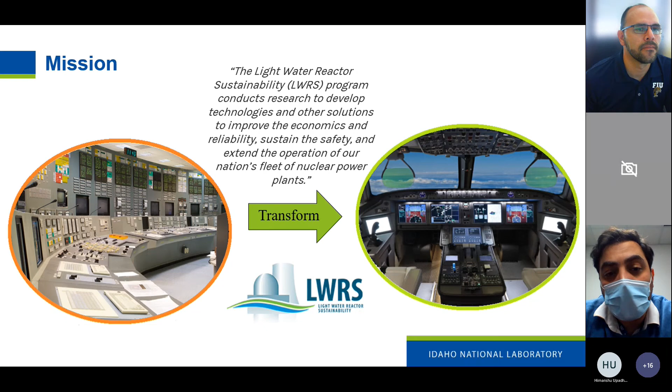Within that transform arrow I'm showing in the middle, there are multiple key technologies that we leverage, and AI is one of these key technologies. What I'm going to do today is describe some examples of how we're using AI to automate some of the activities in a nuclear power plant.

The first application, or set of applications, is condition monitoring. When you talk about condition monitoring, it basically means you're trying to determine how much lead time you have for an equipment to operate normally before it fails. Everything in time is going to age, and every piece of equipment in the plant is going to at some point require some sort of maintenance in order for it to be operable. The key question is, how long do you have?

In terms of the model that we have at the moment in the plants, if you look at the failure timeline to failure, usually right before the failure you would have some sort of alarms, and usually operators get these alarms and act on them. But on the other end, you would have maintenance activities that are not based on any observed issues with the equipment, but predicted based on historical data from this and other equipment—this is how much time you would have for this equipment before it fails. So you need to do some maintenance before that.

What we're doing is researching into all these different aspects of condition monitoring. Specifically, I have been mostly interested in anomaly detection. Anomaly detection is an area that falls right before alarms but after predictive maintenance, and it's a function that's currently performed by operators.

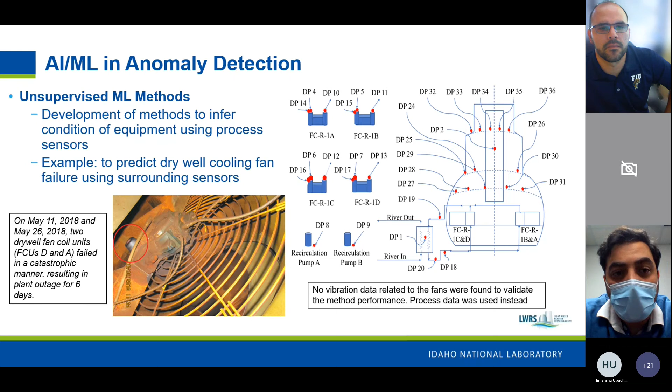The hypothesis we tested was: well, if the fan is degrading, then the temperature profile is going to get impacted because the cooling is not going to be as efficient, and then you might see some rise in your temperatures. And that's the hypothesis we tested.

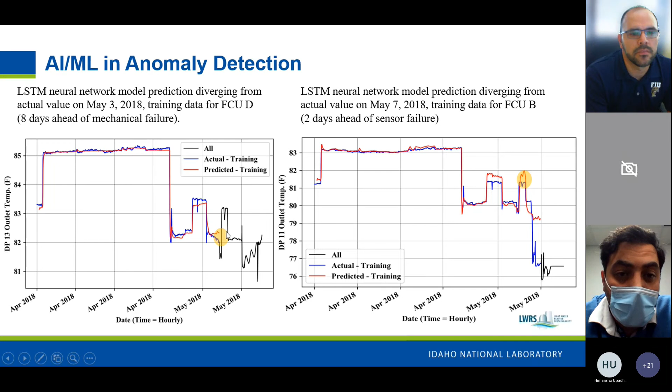Now, this is the prediction and creating the residual parts. Now, once we have the residuals, the next question is, how do we build the classifier to decide that this is an anomaly or not? So in this case, we actually tried multiple different approaches. And one of the approaches was to conduct an F-test using the variance of the residuals.

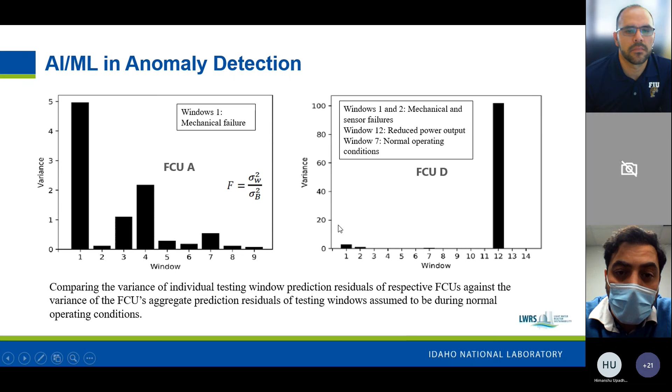Another aspect of this anomaly detection that we've looked at recently is, when things fail in the plant, you gain some knowledge. So if these fans I just described to you experienced a failure, that's information that you can use to improve your training process. The problem is that when you're trying to label some of your failures, you're not going to end up with a complete set of labels. So most of the time, you do not know whether this equipment is actually in a fully normal state, or it does have some issue that's undetectable and growing, but is there.

So most of your data is actually unlabeled, but you do have some cases where your data is labeled because you did observe some failures. And that's why we had to look into semi-supervised machine learning methods. And in our case, these labels came from something called condition reports. I'll come to that today in my presentation and talk about more details, because there's much more research going into these. But condition reports are just documents that report the status of equipment. So sometimes they do mention that there is an issue with this equipment and it needs some maintenance. So that gives you a label.

And now you have to define a window of time around this label that you would apply to the data. So that's an effort that we started last year. And we've tested one of the methods that exists in literature, I think it's called DeepSAD. And we also developed our own. And there's actually a report published on this. But that's another direction that we also looked into.

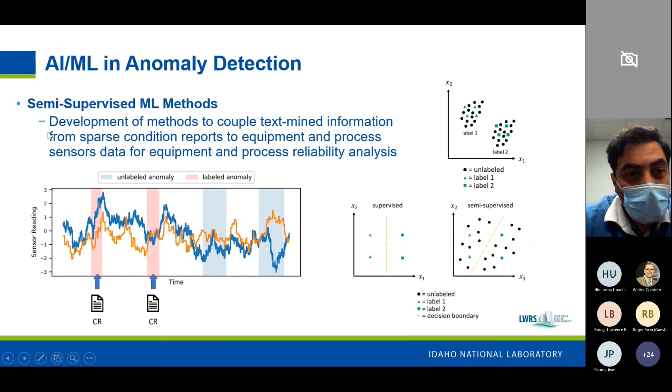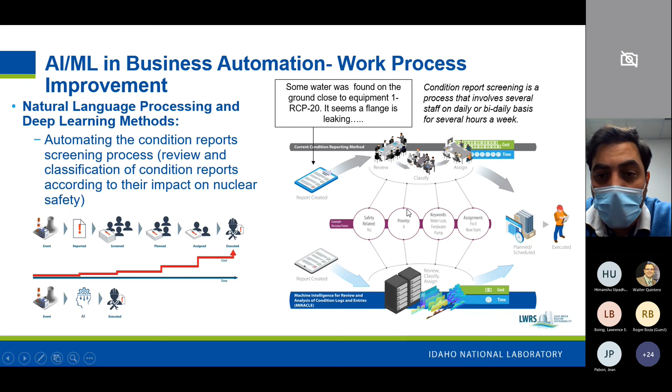And that's what we've been working on. We have something called Miracle that's been developed by INL for that specific purpose. But automating this process gives us a lot of insight. I just mentioned with the anomaly detection that with the keyword part, we can actually create labels that can be used for equipment reliability. And that's one application. But there are other applications that we are looking into in addition to saving time and cost. So this whole committee review process can be automated, but there are also multiple benefits to that. But before I dig into that, you might ask, what are we doing here?

Again, at a high level, we're taking all the fields, the categorical fields and the text fields here. We feed the text part into a feature extraction engine, and then we build classifiers based on these. For the feature extraction engines, we use models that are commonly used. Facebook and Google have some, like BERT or RoBERTa, if you're familiar with them. And the idea here is just to build classifiers on top of that.

Now, a broader benefit for this effort is inspection or assessment of plants. Nuclear power plants are highly regulated, which means that they have periodic inspections by the government, meaning the Nuclear Regulatory Commission, or assessments by independent parties that the industry has formed, like INPO. The aim of these inspections or assessments is to make sure that the plant is complying with the commitments it made in terms of its safety assurance, and they occur very frequently. And they are time consuming. They require a lot of time from the plant and also from the inspectors or assessment folks. So it is a lengthy process that requires a lot of data gathering and data analysis.

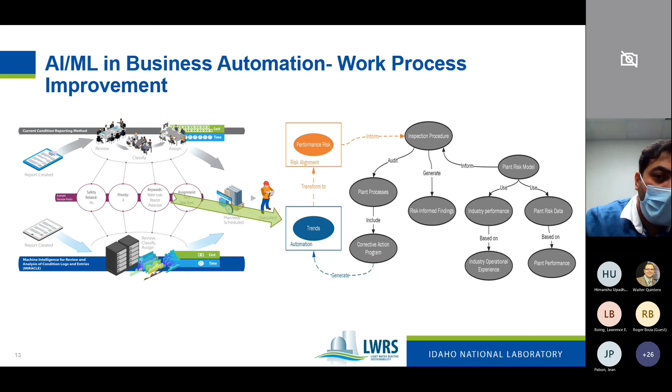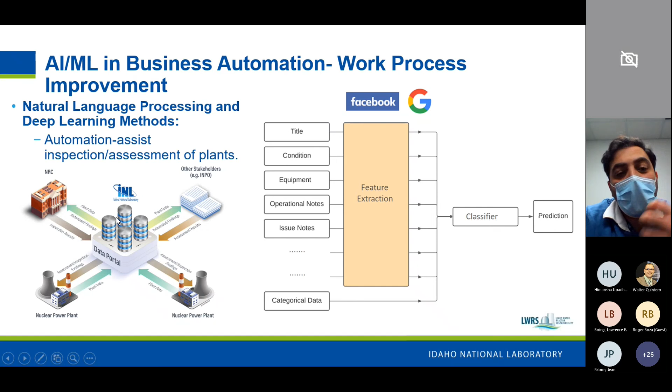When I showed you that picture earlier with multiple plants sending data into one location, one data portal, one of the key aspects is integrating data from multiple plants. We had to look at this, and that's a common problem with machine learning or AI.

If you're trying to build a classifier for a certain nuclear power plant, and then another plant comes in with their data, and you try to apply the same classifier to that plant, you'll have to do a lot of mapping, because you built that classifier to work with the data from the first plant, and the fields coming in from the second plant's data set aren't going to be the same. They use different terminology, different fields. Even though it's the same process, every plant can have its own unique way of applying that process. They don't have to have the exact same one.

So one way to do it is the manual mapping process approach. You basically take the classifier built for the first plant and start mapping the second plant's data to the first one. It's time consuming, you'll make mistakes for sure, and you might even have to discard some fields because they might not map to anything in the first plant.

Another approach is to combine all the fields into one single large field. So all the headers or columns in your data set, you combine them all into one input, and then build a classifier based on that input. That's another approach we tested, called the adaptable data mapping approach.

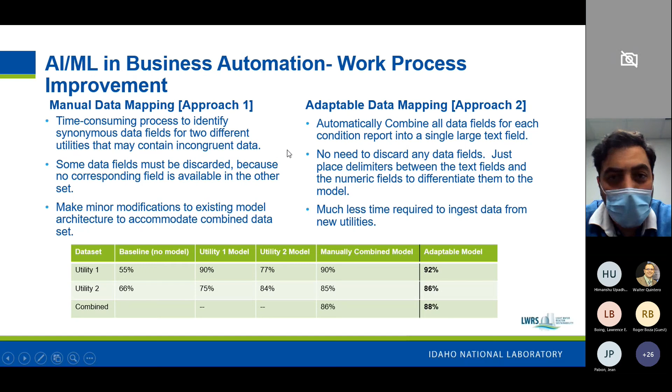We're also now looking at building a dictionary, as I mentioned earlier, but I'm not showing it here again because of time. So I'm just going to skip to the next topic.

Another topic we looked into is inventory management. In a typical nuclear power plant, you have an excess of $100 million worth of stocking inventory in your warehouses. The industry does that because they have a conservative minimum stocking requirement threshold usually set. It's usually safer to have things stocked more than what you need than to require a part and find out you don't have it and have to wait for it. That's the approach the industry has been taking.

What AI can do in this case is optimize the usage of that minimum stocking requirement number, that threshold, informed by the amount of work you actually do. If you know how much work you do, and can predict how much work you'll need to do, you can better optimize what parts you need and when you need them. That would save you a lot of money. We expect to save tens of millions of dollars for each plant using this approach.

When we started looking at this a couple of years ago, the first hurdle we faced was that a lot of the records in their inventory were duplicates. The same item was created multiple times. Every time they buy that item, they might not go find it and increase the quantities they have; sometimes they create a new entry instead. That creates a problem for a prediction algorithm, because you don't really know the actual inventory you have of that item unless you find these duplicates and consolidate them.

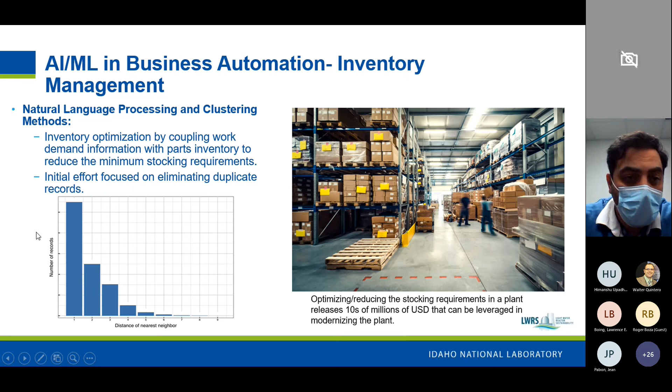So there's a lot of value in consolidating these records, and that's what we started with. This is an ongoing effort.

All right, so I'm moving now to a different topic, which is support functions. I think I have 10 minutes left, so I'm going to rush a bit.

The first activity I'm going to talk about is fire watch. In a nuclear power plant, you sometimes have activities that involve a fire hazard, like welding, and you need this to be monitored. What plants are usually required to do is have someone called a fire watch sit there and watch for a fire. In case there is a fire, they report it, or sometimes they take action and try to put it out.

Another case is when the fire protection system is down, whether for maintenance or because of a failure. Then they are required to have fire watches in multiple locations in the plant, and this can become really expensive. This number here, $1 million per month, is something we heard from multiple utilities, so this cost can become significant.

Now, if you would say, why don't I just put a camera and have someone build an algorithm that can do exactly what they're doing? That's actually what we did. We developed a computer vision machine learning algorithm that can detect fires in videos, and I'll show you examples in a minute. The problem is false positives, which represent people being called in, or maybe calling in the fire department. You want to reduce the false positives as much as possible.

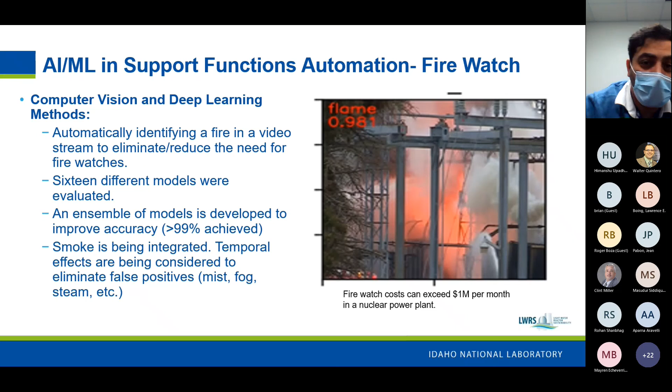We're also looking at ways to detect smoke. Smoke is more challenging because you have steam, leaks, fog, mist, all of which resemble the shape of smoke. So building a classifier just to recognize the shape or look of smoke is not going to be enough. We're now looking at using temporal effects, the motion of smoke, to distinguish it from steam and others. If that doesn't work, we'll still have to figure out a way to do it, because it's really valuable.

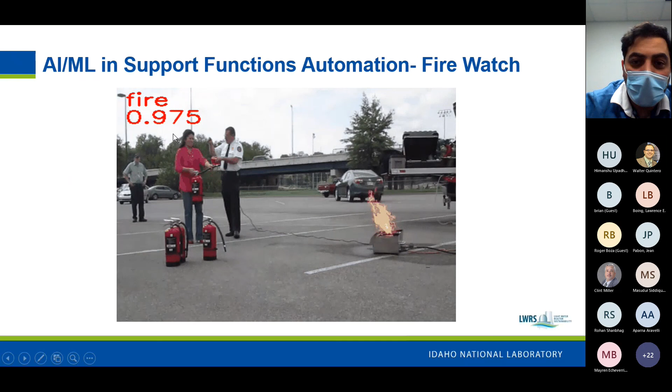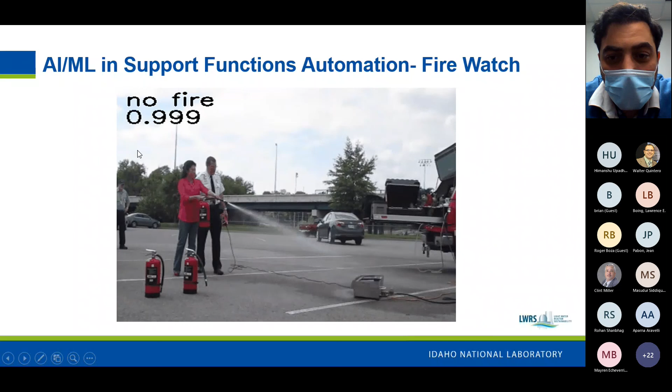I'm showing here an example of the results we got. The thing I like about this video is the fire is on and off, and you can track it as it goes down. You can see the accuracy going down—there you go, no fire—and it comes back up. Fire, no fire. Just a small demonstration of how the algorithm is working.

One of the challenges we faced is that sometimes the algorithm was classifying fire and we couldn't understand why. A good example: a lot of the videos had firemen in them. When there was a fireman in the video without fire, the algorithm would get tricked into saying this is fire too, because it learned the fireman as a feature of fire, which is of course wrong.

So we decided that we need to create some form of transparency to know what the algorithm is actually looking at. And we used an algorithm that already exists, I think it's called GradCam, but I'm using memory here so I'm not sure. It can actually provide you with a heat map of what is the driver for that decision when it detected fire.

In this case, for example, you can see that the heat map is pointing around this area, which is where the fire is. So it's actually correctly classifying the fire for the right reasons. In other cases, you would see that it's actually pointing at things that look like fire but are not fire. Even though there was fire in the video and the classification decision was correct, it wasn't doing it for the right reasons, which is also something we want to look into.

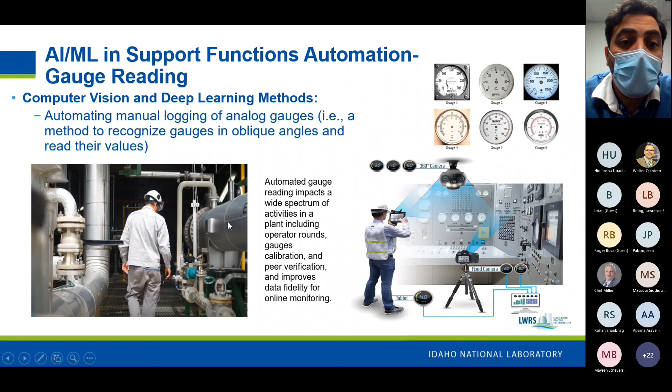Taking a picture of this whole panel at once and logging it is a matter of milliseconds rather than the time it takes to do it now. There's also potential for other activities - in some cases, when these gauges get logged, the plant requires someone else to go in and log them too, because they are really critical and they want two different people to do it. So now we can use something like this tablet to do that instead of having to ask someone else to come in and do the exact same thing.

I think this is the last application I'm going to talk about today, and in my view, it's one of the coolest. We're also flying drones autonomously in a nuclear power plant. The reason we're doing this is there are a lot of activities in a nuclear power plant that rely on people walking around and collecting data. This could be as simple as a security round just to check that everything is in order, or an operator round to check that equipment is okay and running fine. It could be inspections - in some cases you want to access hazardous locations and don't want to send people in. You want to conduct radiation surveys or warehouse surveys and so on. There are many, many applications for drones in a nuclear power plant.

Now the challenge is most of the nuclear power plant environment is indoors, so there is no GPS, and you have doors between these indoor environments.

Having something like a drone that flies using LiDAR or some other technology means you have to have one in each single environment. That can become really expensive very quickly. And then, of course, there's the battery capacity of these drones - they can only fly for a shorter period of time before they need to be recharged.

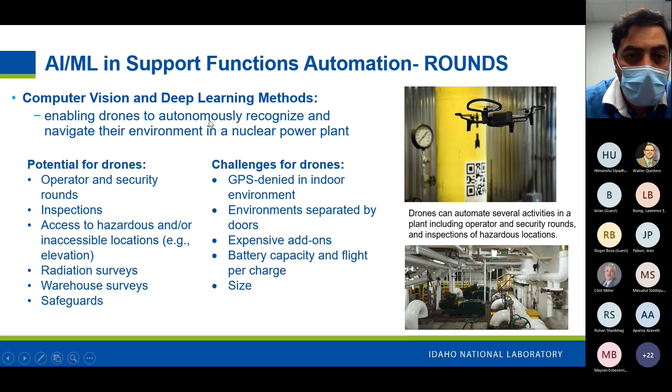So what we looked into is something cheap, because we wanted to deploy as many as possible within these door isolated environments. We also wanted something accurate, that can allow the drone to fly autonomously and accurately within these environments. So we created ROUNDS - that's the name of the technology. I'm going to play this video and then tell you more about it.

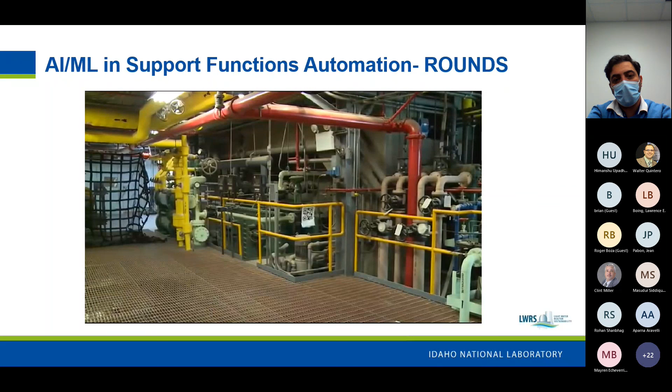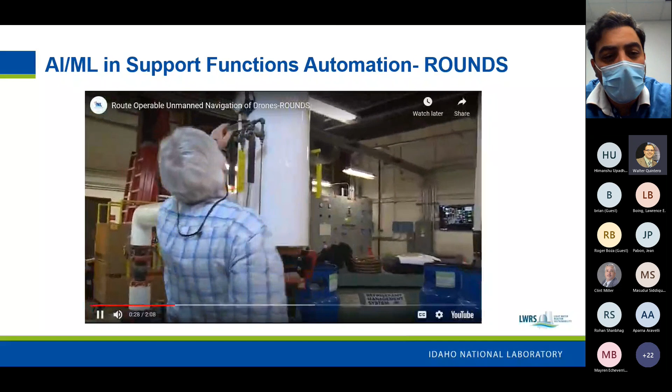There's no sound, Dr. Rashdan. There is no sound. Okay, I thought we resolved this. Apparently not, sorry about that.

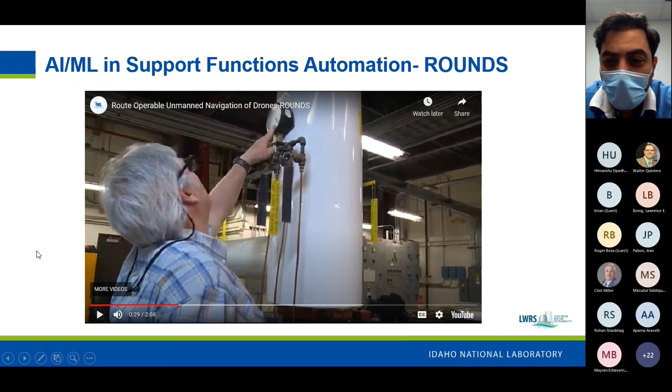The basic concept is we use inserted visual features, and we make these features easily detectable. Specifically, we're using QR codes, just like the ones shown here. You can actually print QR codes on A4 paper and deploy them along the path of the drone, just like I'm showing in this picture.

What the drone does is, when it's looking at that QR code, in addition to just reading it, it can actually look at the view of it. So if you're looking at the QR code from an angle, you'll see something like a trapezoid - you won't see a square anymore.

Rectifying that trapezoid to a square or rectangle, depending on the shape of the QR code, gives you insight about where the drone is with respect to the QR code, provided you know the size of the QR code. That's, on a high level, the concept of how this works.

So with this, if you find the location of the drone with respect to the QR code, all you need to do is feed it back into where you want to be, and you can have an autonomous flying drone. Ideally, we'd fit these along the route of the drone, which just looks for the QR codes as it flies, and we could achieve an accuracy in the order of a few inches.

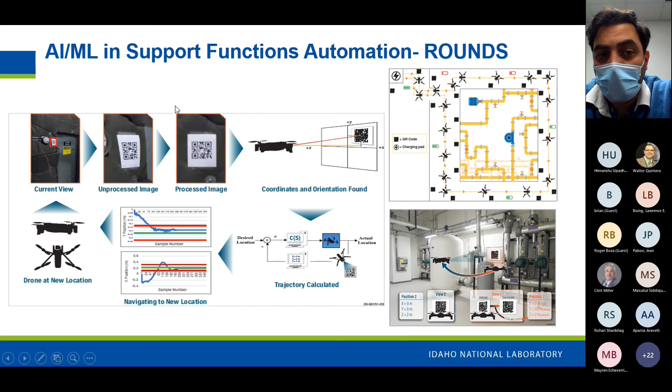Whereas the AI process - the AI in this is finding the QR codes within that environment, and then being able to calculate the exact location with respect to them. That's where the AI kicks in.

This one doesn't have audio in the first place. Because of Corona, we couldn't fly this at the lab, so we simulated this in a real environment - well, in a simulated environment, using the real algorithms. As you can see here, this is the drone from the top view, and this is the front view of the drone. You can see it flying.

I don't know if it's very visible, it's really small, but you can see it's actually finding the QR code in every frame, drawing a box around it, and from that box calculating the location of the drone to a high accuracy. In this case, it's going to land on the charging pad, and we can control how accurate we want it to be. And there you go.

And I think with that, I'm out of time. I'm actually one minute beyond the planned time, and I think I'm done. I don't know what's going on.

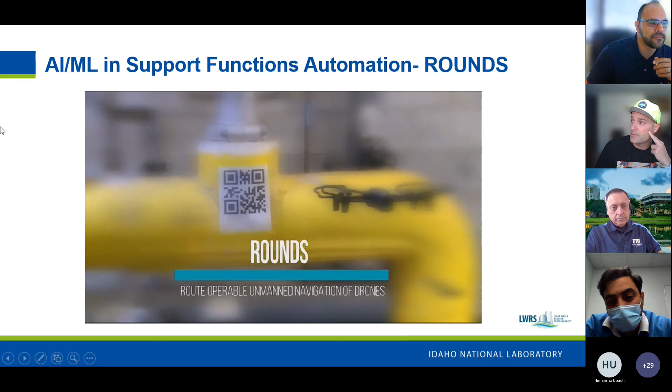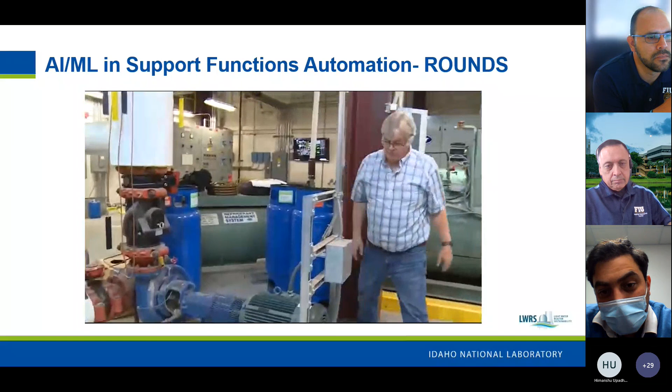The Route-Operable Unmanned Navigation of Drones, or ROUNDS, will allow the autonomous operation of drones in known environments. ROUNDS was developed by the Department of Energy Light Water Reactor Sustainability Program to help automate activities at the current fleet of U.S. nuclear power plants. Cost and safety concerns have motivated the program to search for alternatives to plant workers performing routine activities, such as monitoring equipment or collecting readings.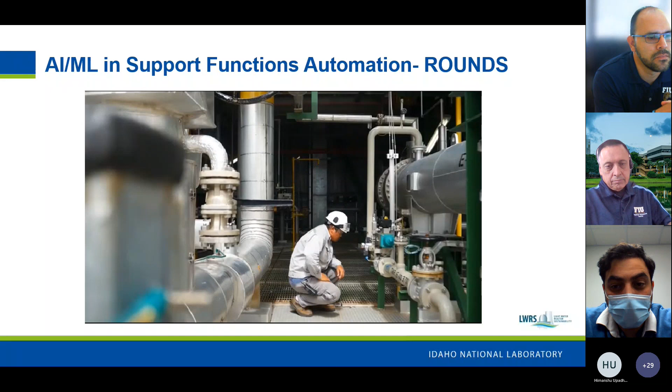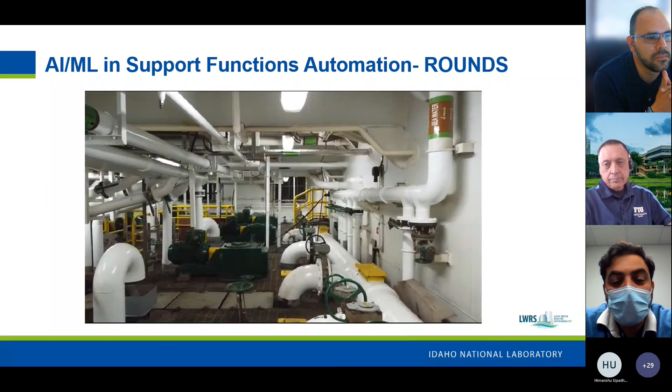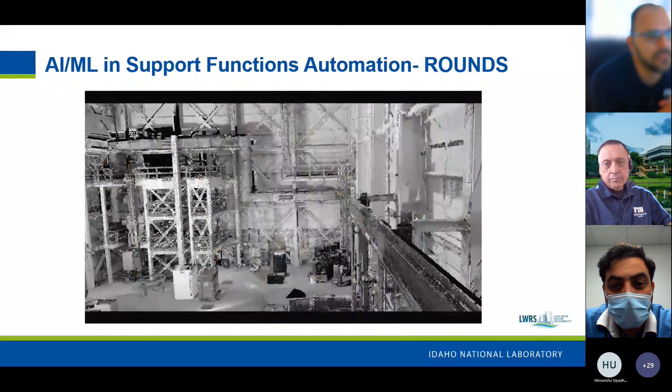ROUNDS allows a drone to automate these manual processes, collect the same information at a much higher frequency, and reduce human exposure to hazards. Industrial environments often have obstacles that can be navigated by drones only if they are equipped with the means to quickly recognize and react to the environment. Other technologies that rely on environmental mapping are not as fast and precise as ROUNDS. They are also more expensive and require additional sensors, which add weight and consume more power.

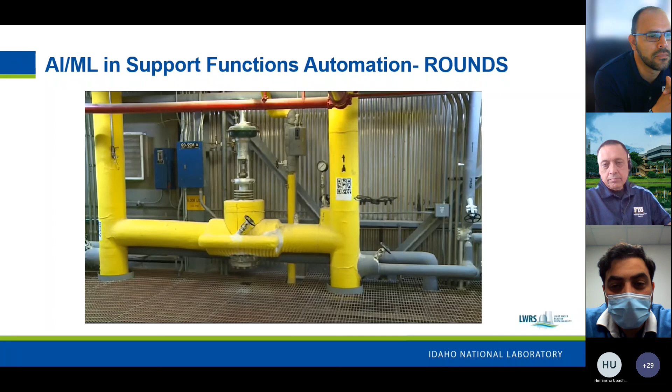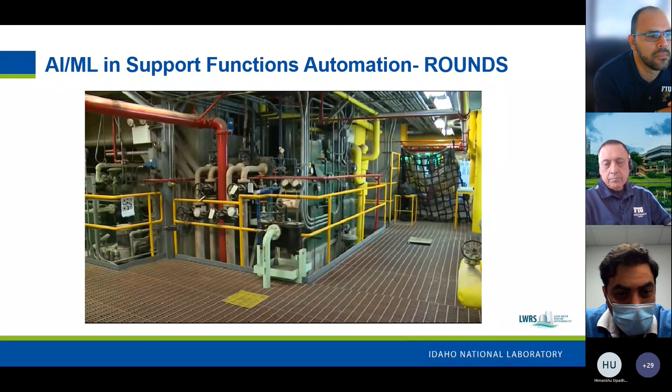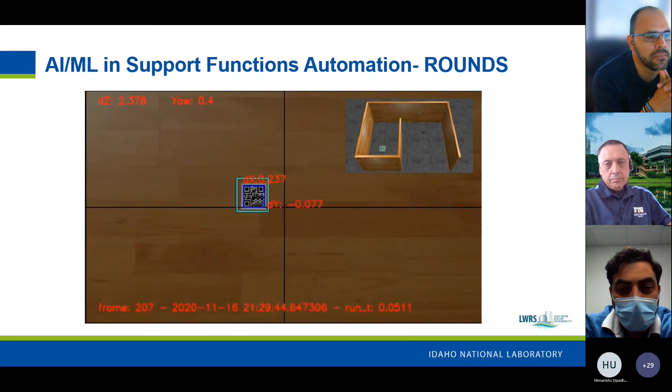ROUNDS enables a drone to autonomously, accurately, and quickly navigate its environment and return to its charging location within a known area, covering a long route on a drone's limited battery charge and preventing the need for charging stops along the drone's flight path. The novelty of this technology lies in ROUNDS' use of artificial intelligence and advanced image processing to frame the QR codes in a video stream and use the frame shape to reverse calculate the drone position.

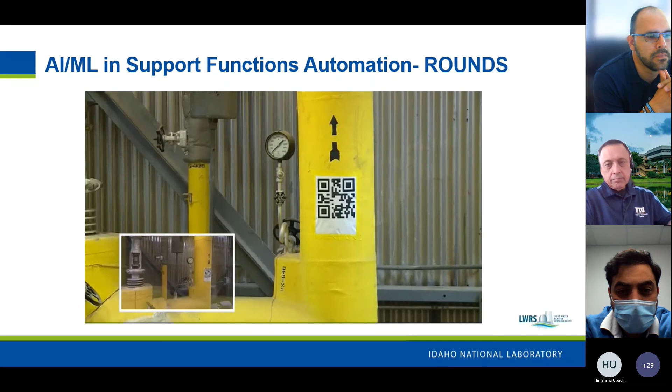ROUNDS can then tightly control the drone's motion through high-performance controllers, such as those used to control missiles and satellites. By leveraging the drone camera and printed QR code stickers, the cost to deploy ROUNDS remains low. ROUNDS can be used in industries that perform security and operations rounds, warehouse surveys, and chemical or radiation monitoring in hazardous areas, among others. For further information, please contact...

Hi. I already kind of mentioned everything in the video. It was meant to play the video before I talk about it in detail, but it's all good. No, thank you. Thank you so much. Hey, Walter, I think JP had a question. Go ahead. Yeah, Dr. Al Rashdan, good presentation.

Thank you. For some reason I hear feedback. Yeah, there's a lot of feedback. Doctor, stop sharing the screen so that way there's no feedback. Yeah, that should be better.